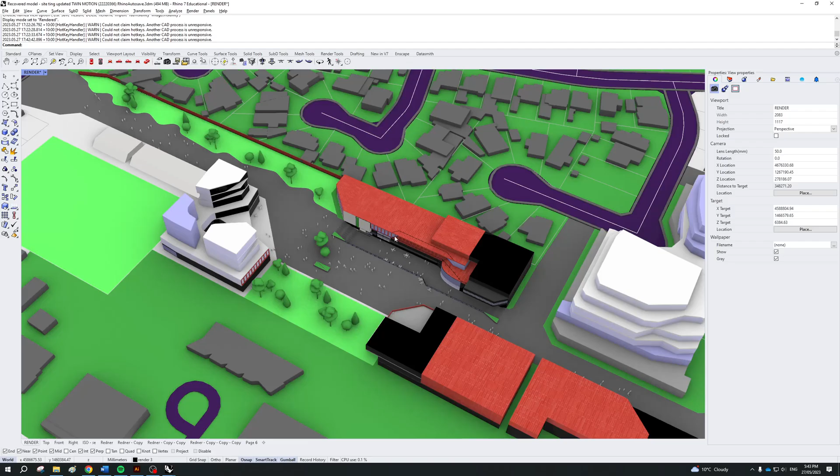We're going to select a viewport in Rhino, using the file we used earlier. Let's have a view from this balcony area. Zoom in here, move the camera around, and line it up nicely. To select this viewport, I want to turn off these black boxes quickly.

Now we need to go to save view, go to the icon with the little save icon, left click, save view by name, and we can just name it render.

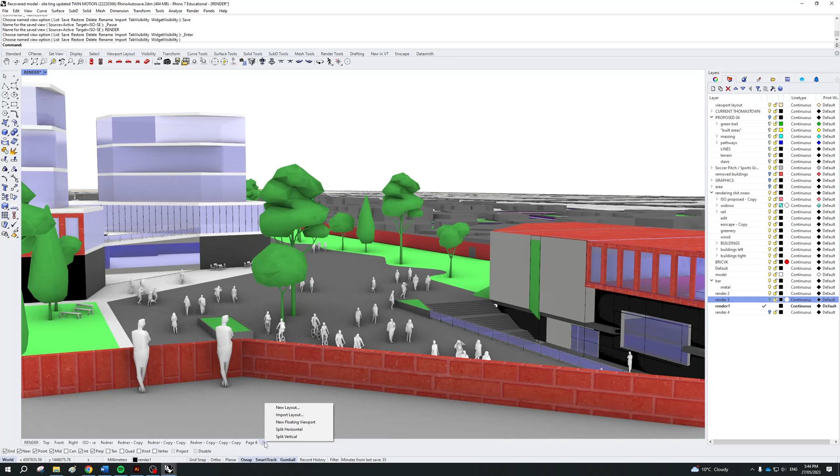Now we want to add a new viewport, so click this plus button, new layout. This was explained in my other video. We're going to keep it at these heights because it's similar to the one we use in Veras, just in case you need to. We might name this one render. So we can see here, it's render.

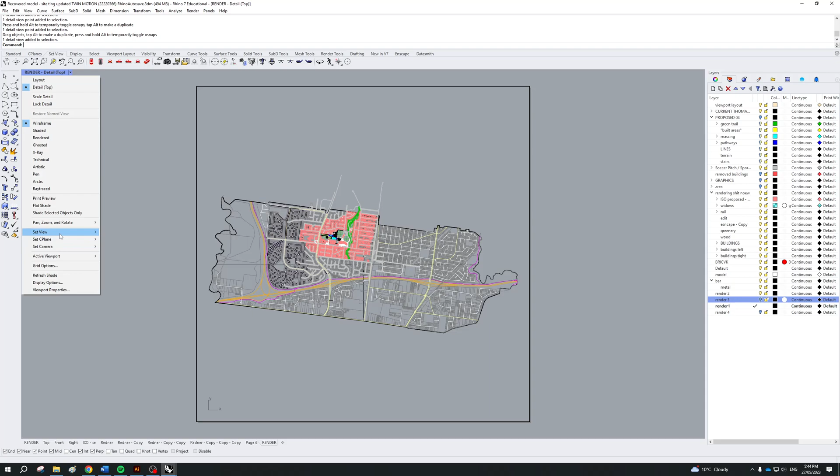To create this viewport, drag out these corners so it takes up all the space, then left click into here to make sure it says top, because that's the view we're at, and we want that to now say render. So set view, render, and this is the view we just got.

You want to change it to shaded, or more importantly rendered, because we've got those trees. I'd say we want to see more of this building, so we can click in here, change this viewport, and update it if we want to save. Type render, and it'll update this viewport.

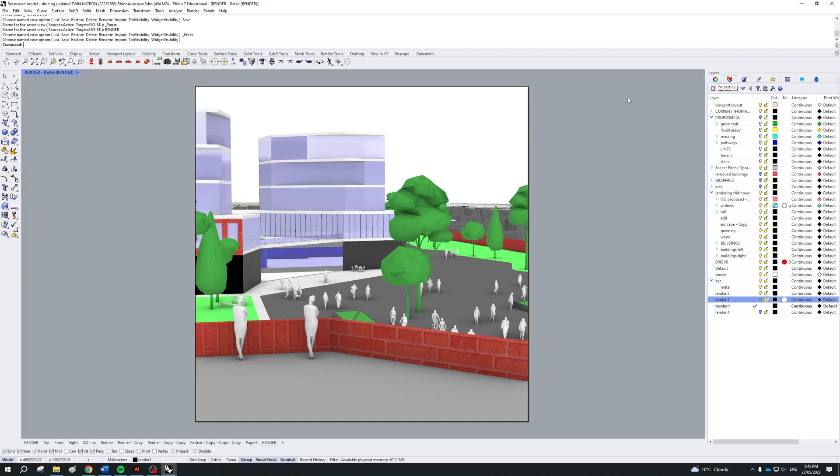Also what we can do now is lock this. Click out of it, lock, to make sure we can't move in and around it. Now we can get as closely zoomed as possible to get the best quality.

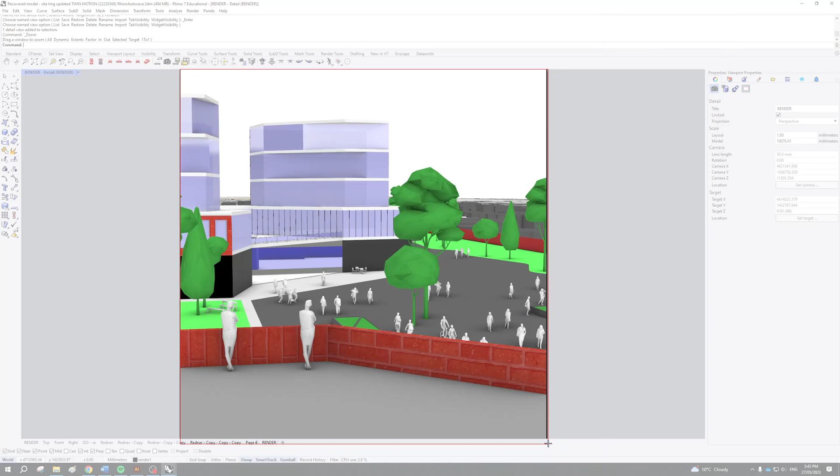Then go to snipping tool and highlight this area. This is what we're going to start off with. Now that we've got the viewport, we've got to add an image, and this is how we're going to get that image. We go to snipping tool, save this, snap it to our desktop as capture, and now we're able to go to DreamStudio.

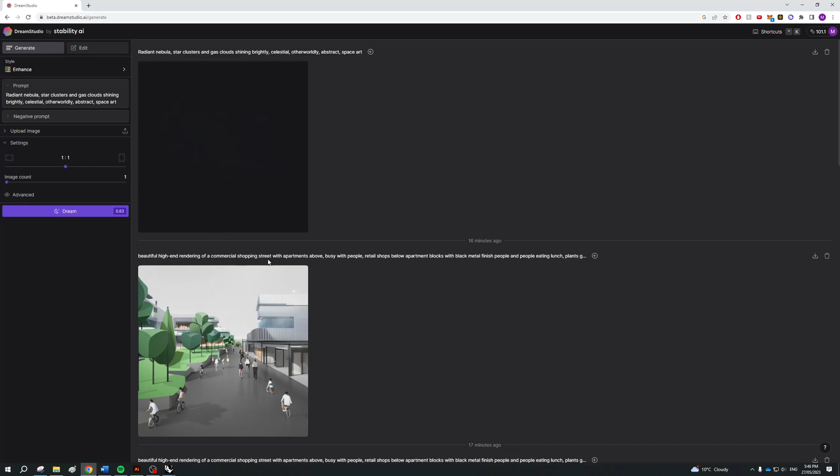Let's just see what this random prompt is. Radiant Nebula Abstract Space Art Celestial, so something in space. I think it'll do a good job of this. Yeah, it does quite well. That's AI generated. Looks pretty crazy, but we're not going to be using that.

So we're going to upload an image, which is going to be this one, and we can change the image strength. I'd say start off a bit lower, but also maybe a bit over 55 and below 85%. So do 72, and we have these steps here.

Now we can add a prompt and start doing variations. I've actually got a prompt from before, so copy this, paste it in here. We don't want cars, and we can also take out some stuff that we don't need. Oh, we might want some people eating some lunch. So we click Dream.

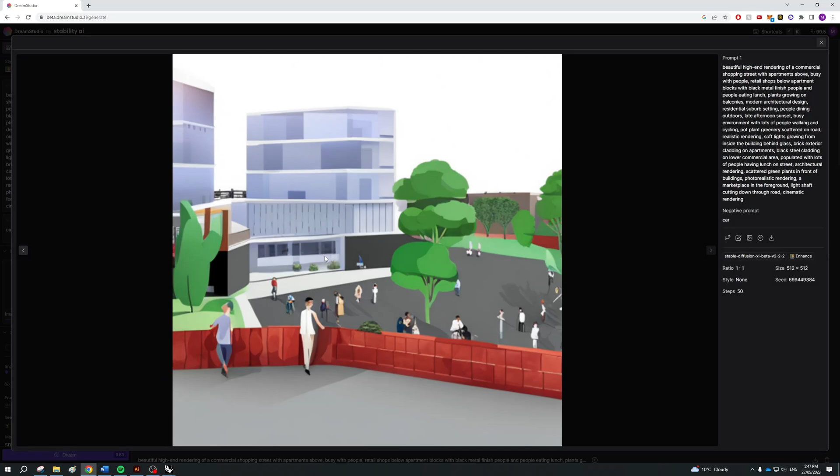Let's see how we're going for time, about 4 minutes. Now we've got to play around with these variations and pick an image that we like. So far this is pretty nice actually, to open the bottom bit up. The apartments are starting to form, and it's got some trees.

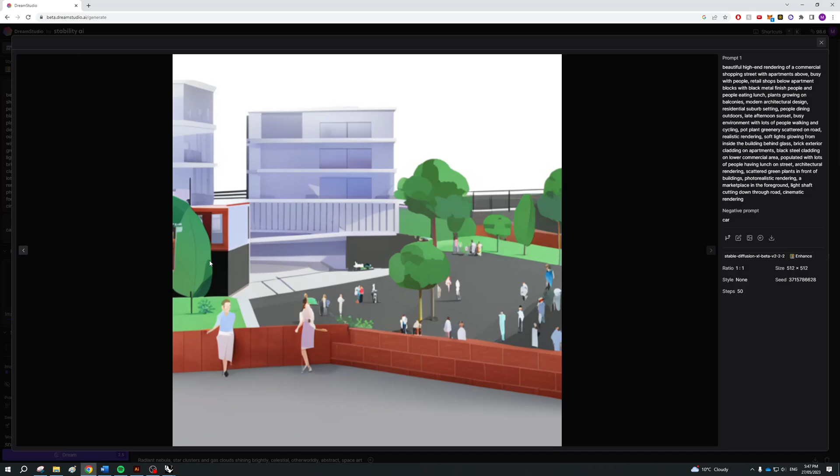Maybe change the generation steps to 150, that's the max it goes, so it generates more steps. I actually like what they put that beam there, but it also goes behind, as you can see, starts changing around. Let's maybe make it closer to image and further away, just to see.

So we know that this one's going to be around 90, and this one's 46. So this one will be a bit more creative, and this one will be closer to the prompt and closer to the image, and there is a prompt strength.

I think this looks quite clean. And yeah, of course the image where this one is taken a very weird twist and hasn't picked up that there's a ground here. It doesn't really know what's happening, so we'll turn this back up.

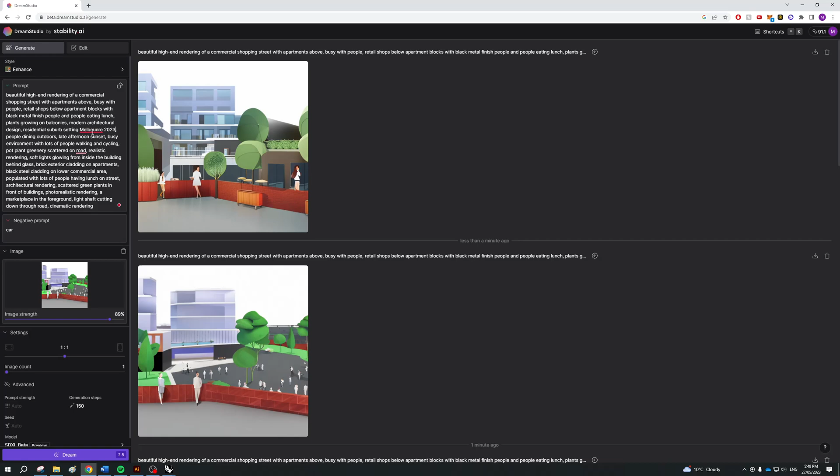And some different stuff. Residential suburb setting, to Melbourne 2023, stick rendering, maybe from Enhance. We'll put this now to photographic.

And you definitely found that we don't want this, we want something more like this. Just get two gone at once. There you go, looks quite nice.

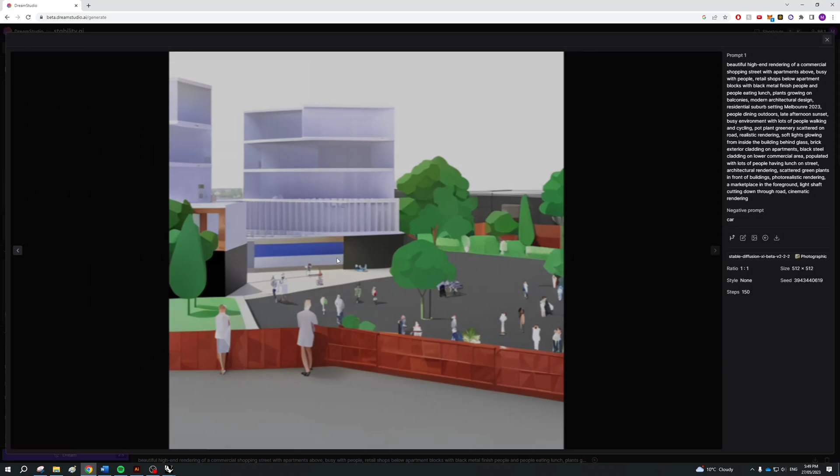Alright, this looks quite nice too. I think this has definitely picked up the form that we want at 80%. And just to get this moving, we've got this brick pattern, the people, and the trees. I think this is quite nice.

So now we're going to use variations, and what this will do is it'll actually place it in here. So go to 100%, you can see these are the same renders, and we're going to compound these renders. I'd say when we get to the final, we want to keep it higher, but we can still play around with this slider.

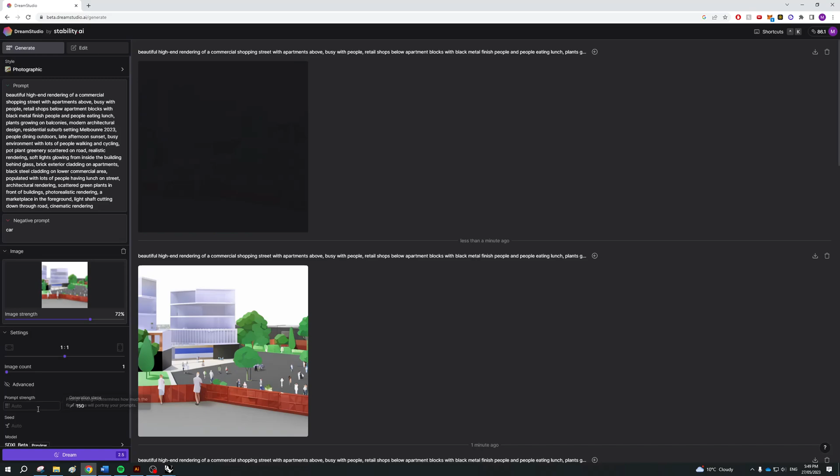And again, it looks even better already. You can see from this variation to this variation.

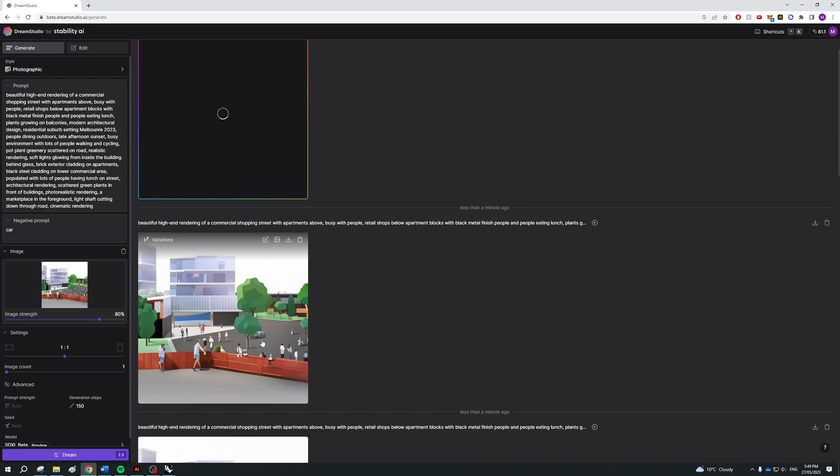So I'd actually want to, I did click another one from this, but let's variate this one again. So this is going to be two variations worth coming in this most recent picture. There's a car there, we actually don't want the car, so it's a little blue bush.

Alright, so they've actually added in more detail in the apartments, they've opened this space up more, and I might turn this down a bit and turn it back up.

Just get some two different trials, and I definitely say when you start finalising renders you can start pumping out maybe 2 to 4 at once. You don't need 10. You start picking what you like, so we'll see which one we liked more, if we like the whole or the higher or the lower.

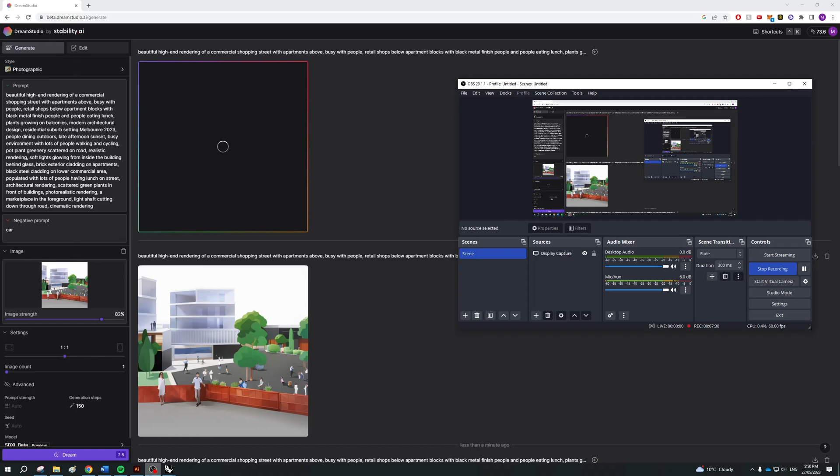Don't really like how it's opened up that bottom bit, or this one here, so let's keep going. But I do like how they've got the trees in this corner compared to this one, so maybe we will use this actually.

So we have variations. Let's turn this to 70 and to 96, and we'll get more and more detail into these renders. And if it's photographic, we might actually start seeing some photographic styles now.

Yeah, you can see these people. This actually looks like somewhat of a person. Not sure what it's doing here.

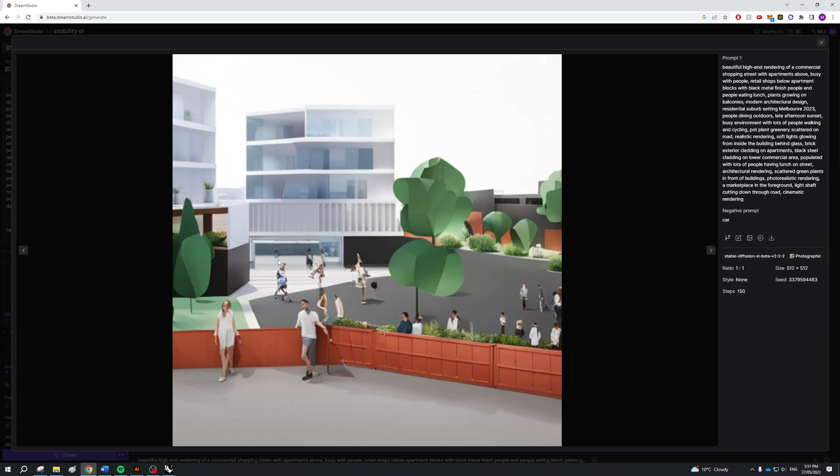Alright, we keep doing variations. Maybe add some more prompts in and just finalize. So we'll go 4 at 80%.

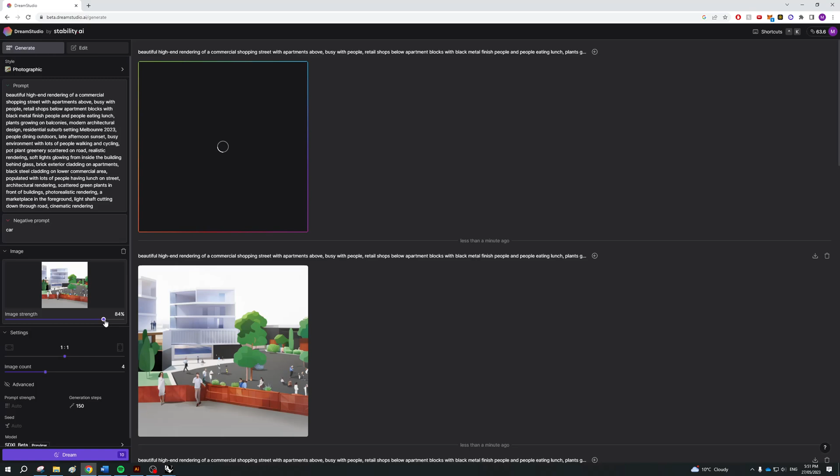If you like this variation, there's people up here which I don't hate. They've gone, so this one's taking pot plants.

Variations. But it will cost you 10 of their credits rather than 2.5, so you got to be able to keep that in mind.

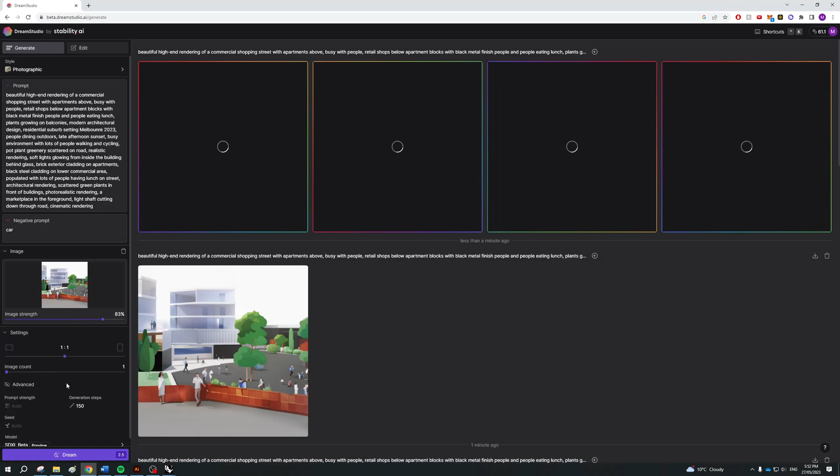Alright, so probably just do one more of these as our final, and I think I like this one the most. Oh, I do like that building design, so I'll do this one.

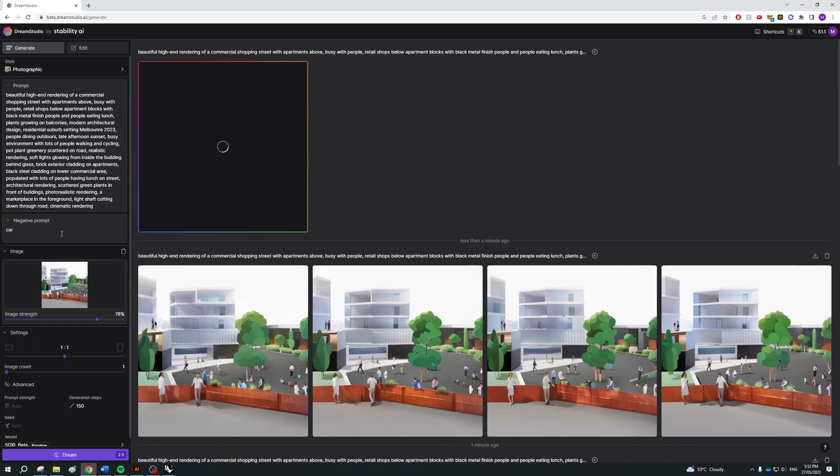And whichever one we like more, we'll download. So, as a final render, I think these turned out alright.

What we're going to do, we're going to click this image, download, make sure we upscale it 2 times. And what the variations will do, save this and open it, is add more depth and shadows into the roads and the people. So if you scroll down a bit further, you can see that there's not really any shadows following.